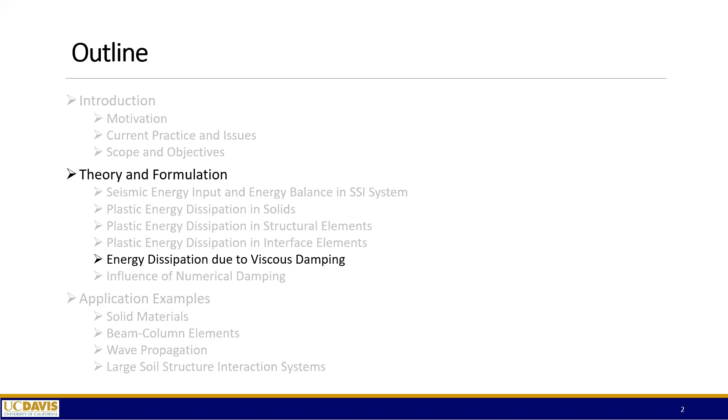So today we're going to continue our lecture on the modeling of energy dissipation in earthquake soil structure interaction. Today we're going to continue to talk about theory and formulation. Specifically, we will be talking about energy dissipation due to viscous damping. So we will always start from the same place, which is the energy balance in a dynamic inelastic system. We have the equation of motion in its global incremental form, like this equation shown right here.

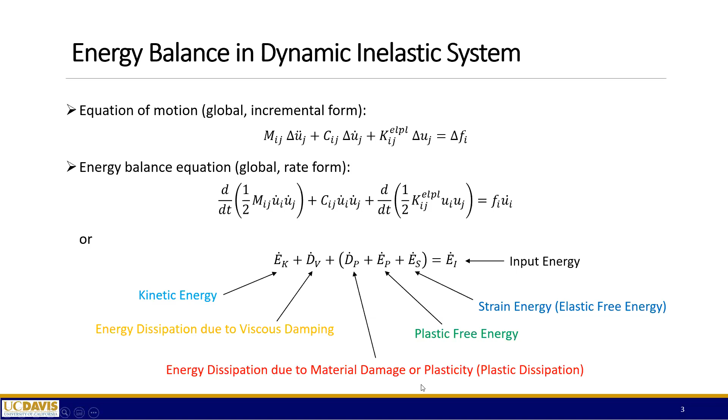Later, we will come back to this equation when we talk about the actual formulation to calculate the energy dissipation due to viscous damping. And then from the equation of motion, we can derive the energy balance equation in its global rate form. And this is the equation. From this equation, we can identify all the energy terms, the kinetic energy, and our topic today, the energy dissipation due to viscous damping, and then everything else that's happening inside the material.

So viscous damping, physically, comes from dissipative interactions between the solids and the viscous fluids that exist in a soil structure interaction system. You can imagine for the structural part that's above the ground surface, whenever you have some kind of motion or vibration, there's going to be interaction between the structure and the surrounding air, and the air is a type of viscous fluid, and that is a dissipative interaction.

And also in soil, you can have saturated or partially saturated soil that serves as a multi-phase media that has a dissipative interaction between the solid and the viscous fluids, like water. This is a very important source of energy dissipation in a soil structure interaction system.

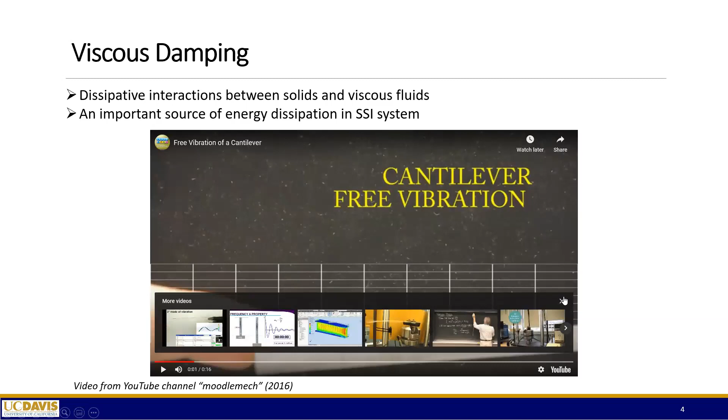So here, there is a movie that I found on YouTube that shows a very simple example of the vibration of a cantilever beam because of the surrounding air. You can see the amplitude of the vibration goes down when you have more cycles of vibration. At the beginning of the video, the cantilever is pushed all the way to the bottom of the screen. When you release, that's the amplitude of your vibration, but then quickly it goes down to a fraction of the original amplitude.

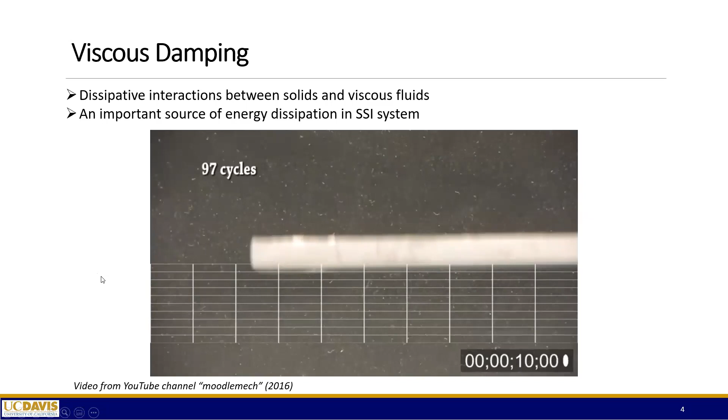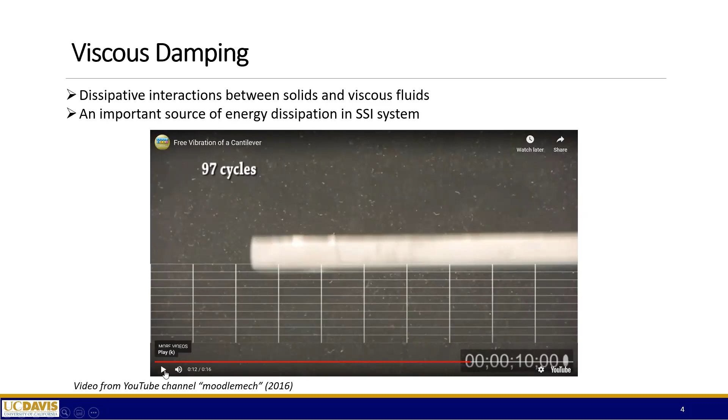Yes, please. So essentially it's going to go down to zero. It's going to vibrate and slowly stop, and this is all because the beam vibrates in air, and there is air going around, and wind, and vortices, so it's going to slowly slow down. So we're going to make a model like this, and we're going to show this, not next time, but after numerical damping. This is going to be very interesting. Yes, go ahead. Thank you.

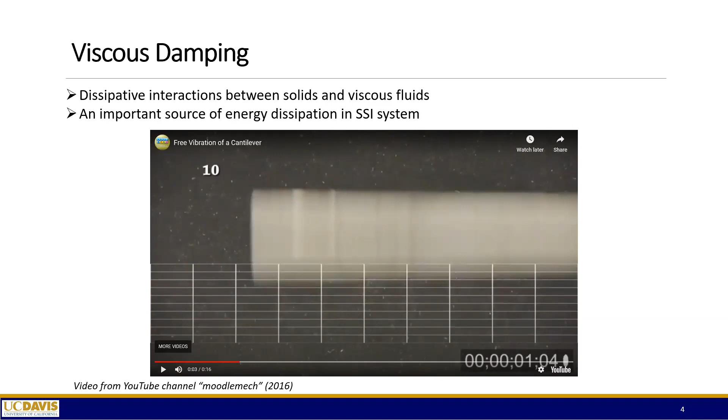Right. So this is just a simple example, and as you can imagine, a similar process will happen on a much larger scale in a soil structure interaction system. In terms of the modeling of viscous damping, we usually use so-called Rayleigh damping, or its more general form, the Caughey damping. A couple of important features of those two types of damping is that they are linear, they are velocity proportional. The second point is that they are explicit in terms of the damping force.

Later, when we show the equation, you will see that the damping force is directly a function of the velocity at specific locations, and there is a damping matrix, and there are ways to calculate the damping matrix, and reasonable choice of the damping parameters. Because it's explicit, it has a relatively low computational cost, and can be used to target a specific frequency range of motion, and it has a large damping ratio for high frequency motions.

This plot on the right side here is a plot of the damping ratio for a specific frequency of motion versus the frequency of the motion. This thick black line is the overall damping ratio, and it is a combination of a mass proportional term and the stiffness proportional term. As the frequency increases, the mass proportional term decreases almost to zero, and the stiffness proportional term increases linearly. The combination of them gives you a curve like this.

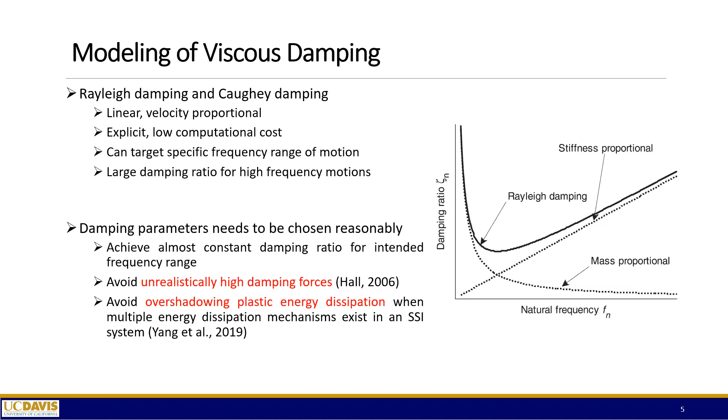It's not true. It's a trick that you can use every once in a while, a little bit, for one range of frequencies. But again, remember, it's a frequency dependent, velocity dependent damping, and it is not to be used for displacement proportional, just like what you said. So go ahead, please. Yeah, right. Okay. So those are some general points for the modeling of viscous damping.

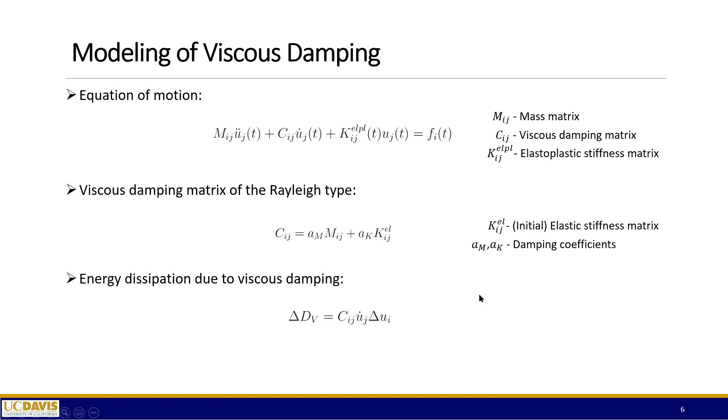So coming back just a little bit on the choosing of the damping coefficients, because it is a very important topic that has been talked about actually not nearly enough, I feel like, but we should be really careful. Right. So here is a very practical procedure given by Professor Hall in his paper in 2006, which is actually very useful, that we have been using in the past few years.

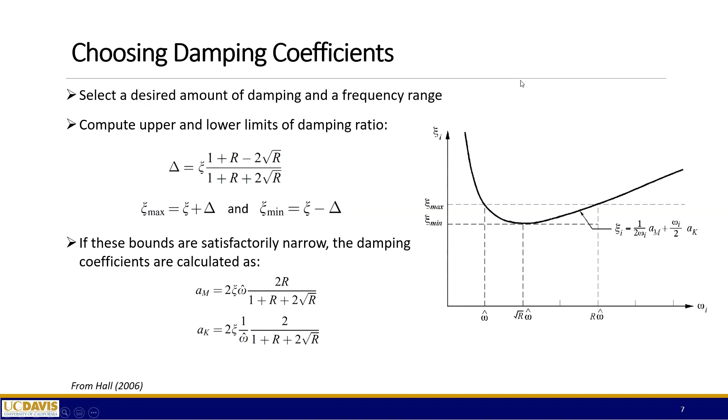So that's it for the calculation of energy dissipation due to viscous damping.

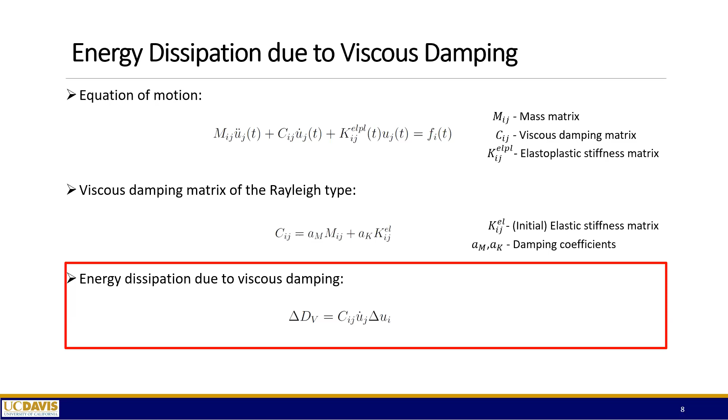And later we're going to talk about some examples to illustrate all these calculations. So we'll make some examples and illustrate all these previous steps.